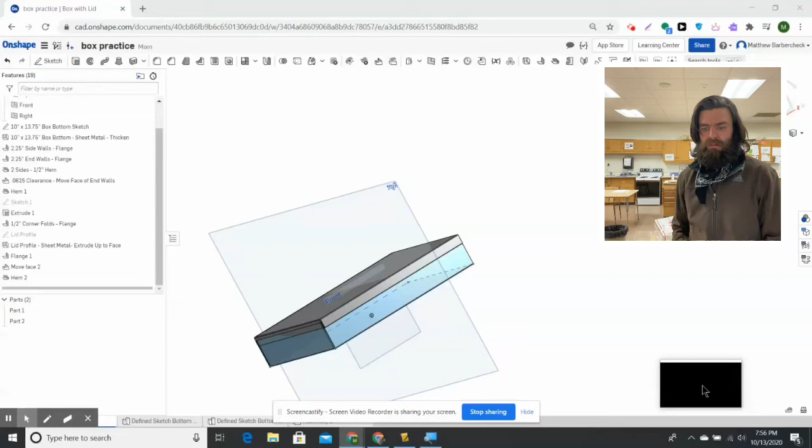Let's get to it here. So here you see the hems, the lids, the corner folds, everything. So I roll that bar back, and now we're just looking at just the box.

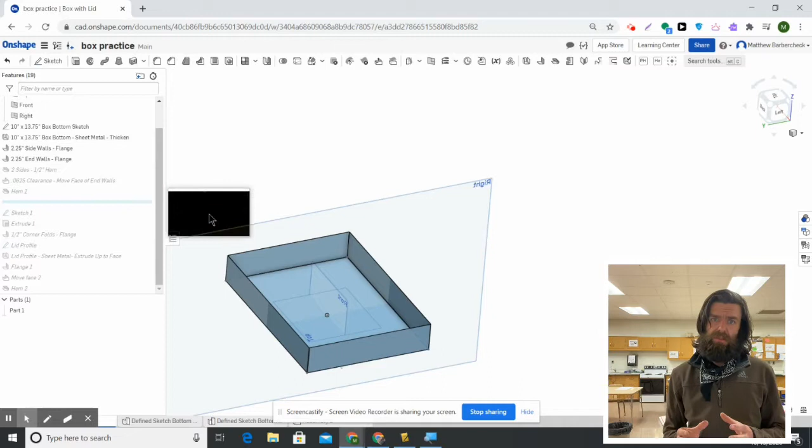We're gonna add 2 of the hems, and then we're gonna have to make a little bit of an adjustment, and then we're gonna add our 3rd hem.

We've got our flat view, and the hems, when we add them, are updated, so it'll start to look very familiar to the in-person layout that you guys have done.

When you hover over something, it turns gold, so you can select it to let you know that is what you're going to select. It turns gold in both views. Look at the flat view right now, and you'll see that the same wall that I'm hovering over in my 3-dimensional view is being highlighted.

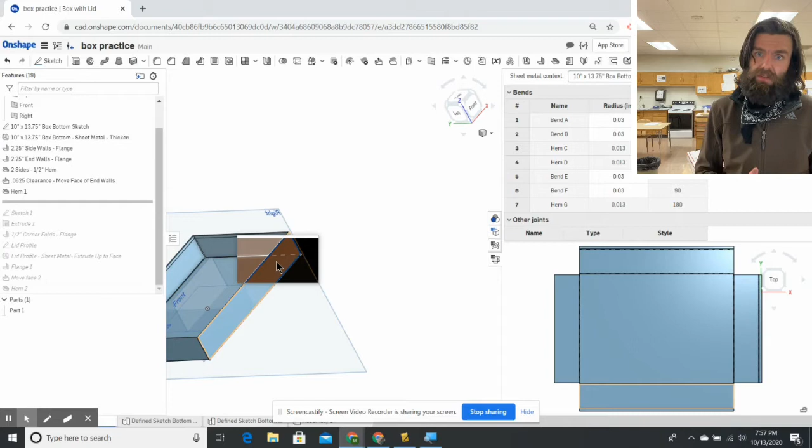Started a dog ear on this end. I will do that in the next video.

I'm going to duplicate this setup. I'm going to delete a bunch of the features that I've done ahead of time so I can get back right to where you guys left off.

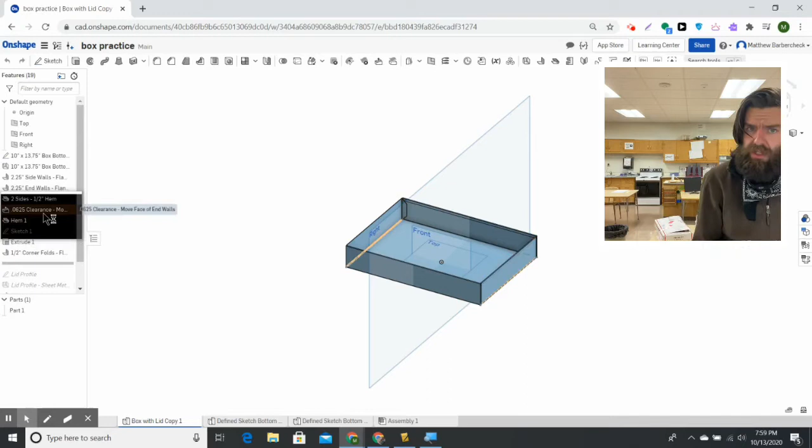To delete something that's in your feature tree or design tree, simply right click and scroll down to hit delete. Now, I don't believe that option is available if you are inside of a feature, like for example if you have a little mini window open, usually a sketch or an extrude or your flange command.

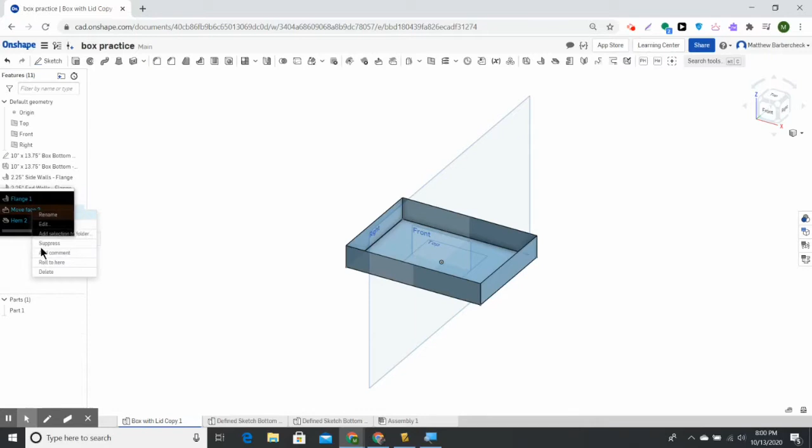I went ahead and opened up my flat view because I'd like to see my flat view updating as I update the 3-dimensional view. I'm gonna go ahead up to my sheet metal toolbar, and I'm gonna select the hem tool.

I'm gonna go ahead and hem the 2 long ends first.

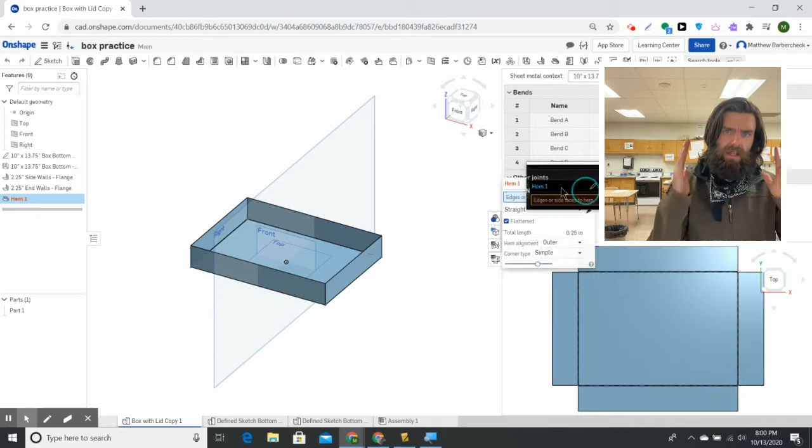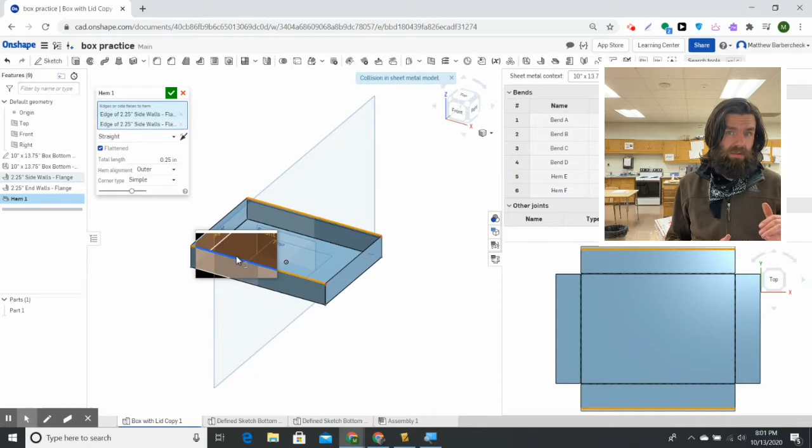You're gonna see we're gonna keep those 2 side wall hems straight, flattened with the check marks, and 0.25. You should also be attentive to if the hems are bending inside the box or outside the box, because that can be adjusted with your double arrows.

I'm gonna go ahead and name it sidewalls, 1/4 inch hem, and then hit our green check mark.

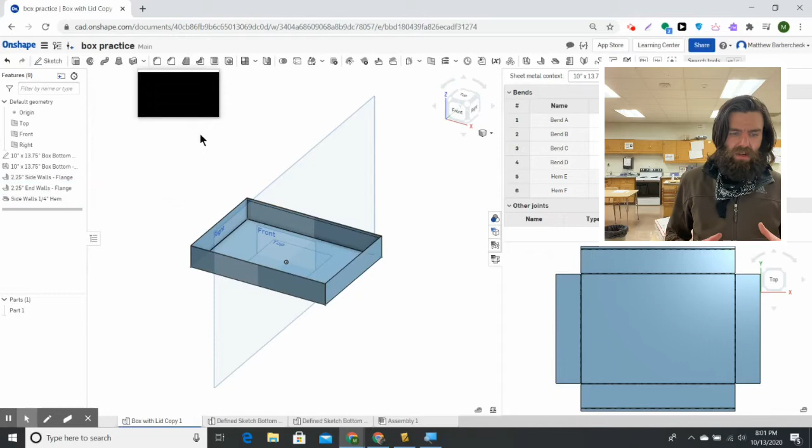Try and add a hem to the 3rd wall. Notice though, when I try and do that 3rd hem, that we end up with interference.

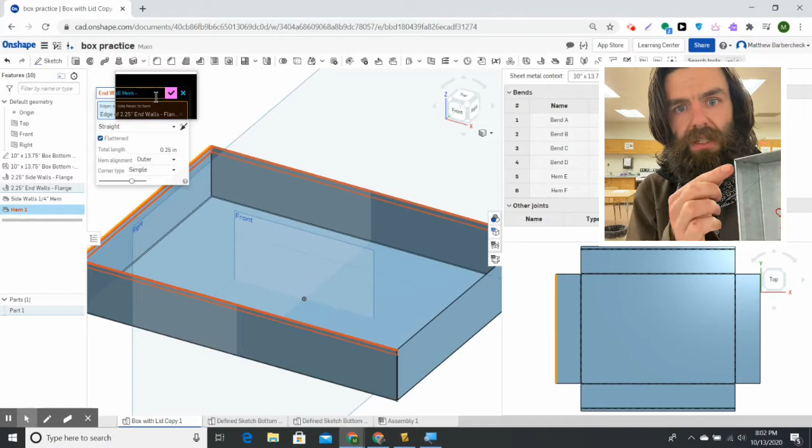In fact, if you zoom in on those red lines, you'll see what's happening is this sheet metal in this corner, when you fold it over, is hitting the sheet metal in this corner, and that can't happen.

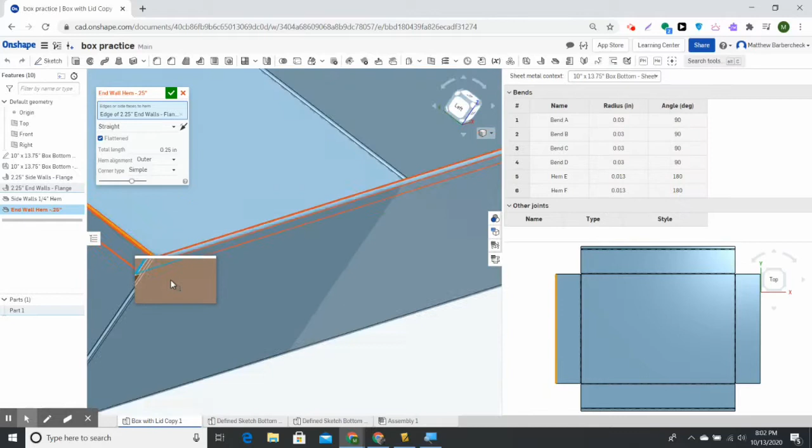It's tough to see the collision point, but see how the metal is folding into each other? So what we're gonna do is we're gonna make the end walls just a tad shorter than what we have right now to give us that clearance.

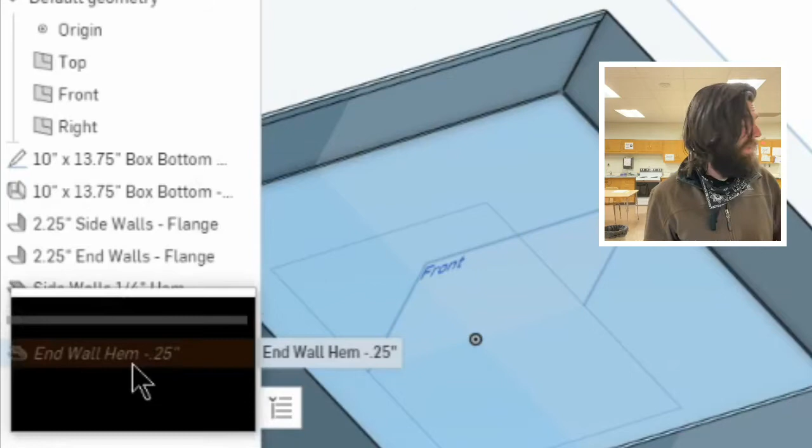I'm gonna drag my roll back bar right above that end wall hems feature. And I'm going to leave that end wall hem feature there, because while it's there, it's not hurting anything. And it will remind me that that is the end goal.

To shrink the walls of that end wall, I'm going to use a command called move face.

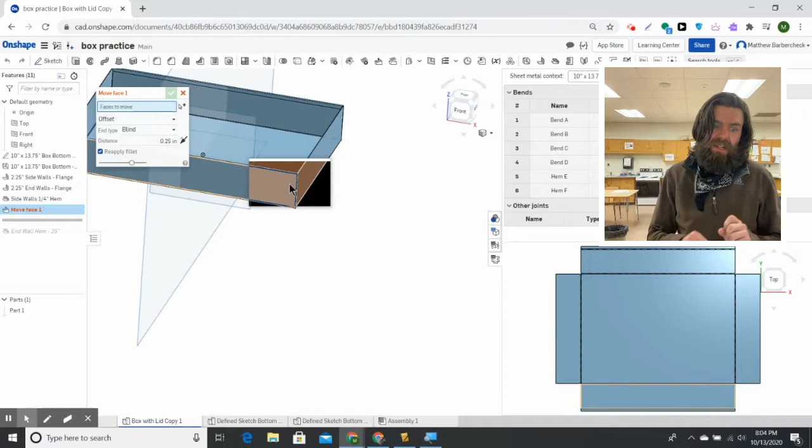We got to zoom in on that end wall face, and I recommend zooming in to the top corner of your part. That way you don't get the 2 faces mixed up, because you can obviously see there's a hem on one of them, and we're moving the face of the wall that does not have a hem.

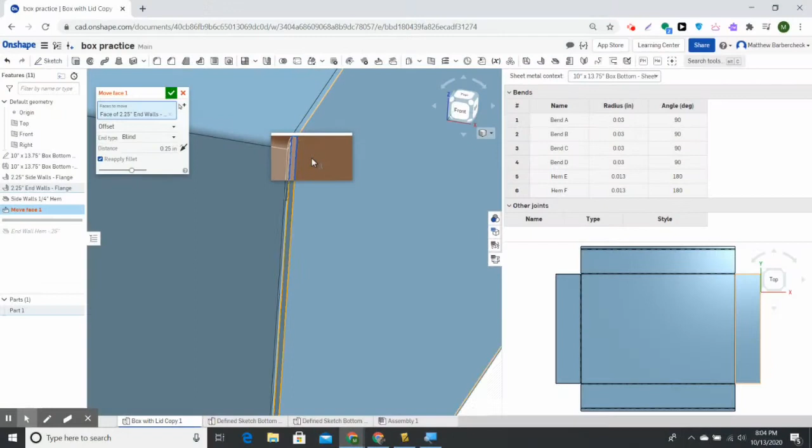Now we're going to move this face. It's going to physically relocate it 0.0625 away from the corner, which is the same as 1/16.

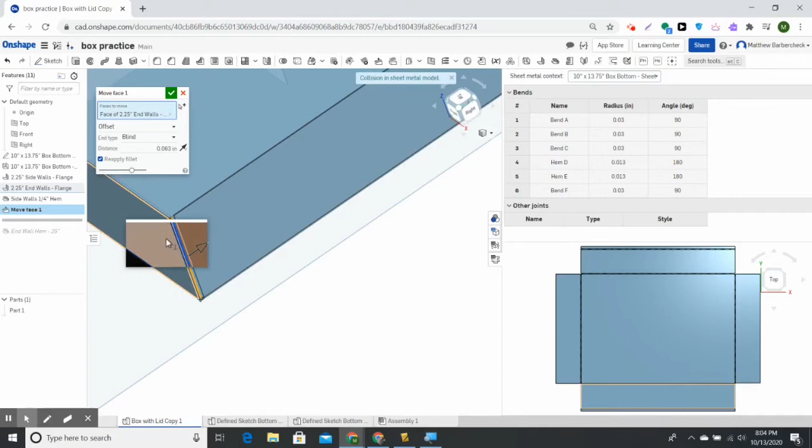Make sure the arrow is pointing inside the box, not outside the box. Otherwise, your wall will actually grow. We want it to shrink. So have the arrow pointing inside the box.

Now, it doesn't really matter which corner you start this on, but I would recommend making sure that the dice in my right-hand corner is oriented in a similar way to the dice in your corner of your screen.

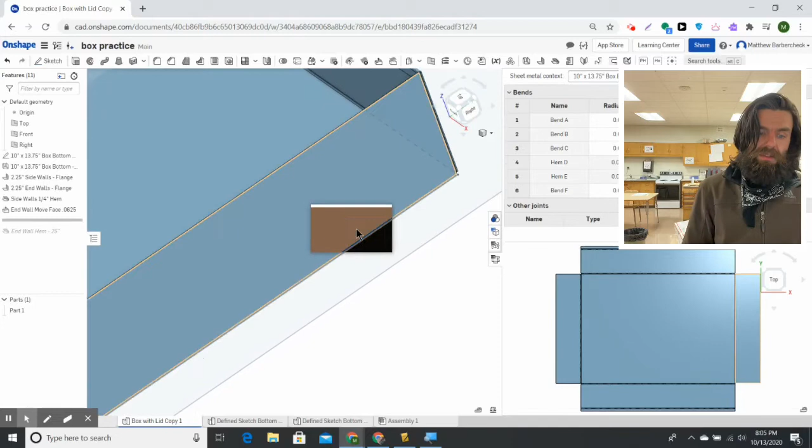So I named that move face command. You're going to do the same. And we're going to use the exact same method to get the opposite side of that wall to shrink in 1/16 of an inch. So follow along and tackle this one maybe a little more independently.

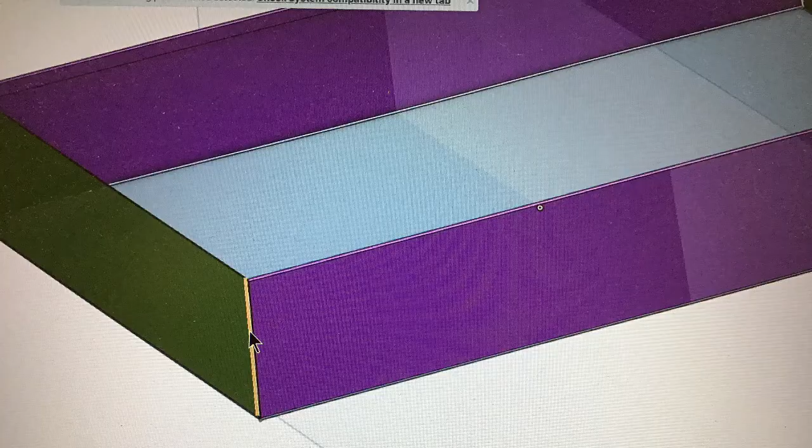Remember, you're picking that skinny face that's on the end of your short walls, shown here again in yellow. We're going to go ahead and shrink the opposite end wall in a similar manner.

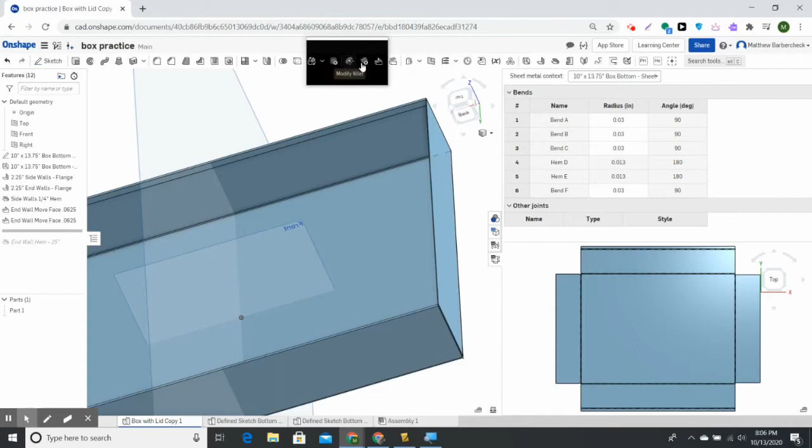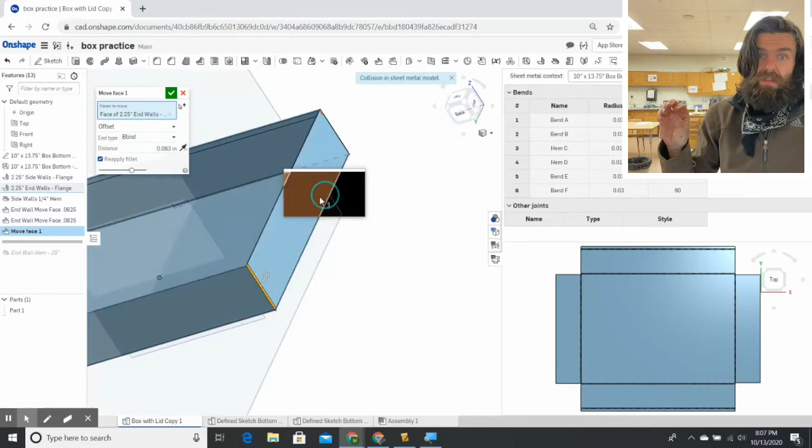In the feature window for Move Face, there is an input rectangle that shows your selections. And this time, instead of selecting one of these skinny faces, we're going to do both of them. It brings up face of 2.25 inch end walls, another good reason to name your features so that you can visualize some of this.

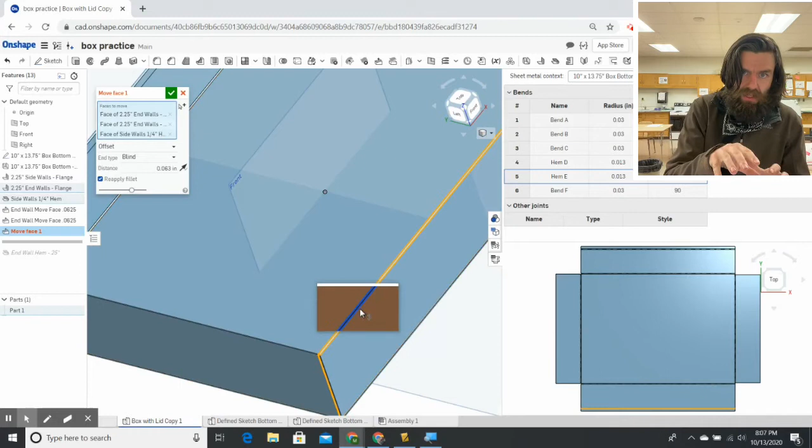Now, what happens if you click the wrong thing like I just did? Well, you can click it again to deselect it, but oftentimes what happens is we accidentally select more and more things, and if you look at the number next to your cursor, it'll tell you how many things you've got selected. And when you click something and it's selected, if you click it again in the exact same spot, it'll deselect it. But if you click something else on accident, it'll select it.

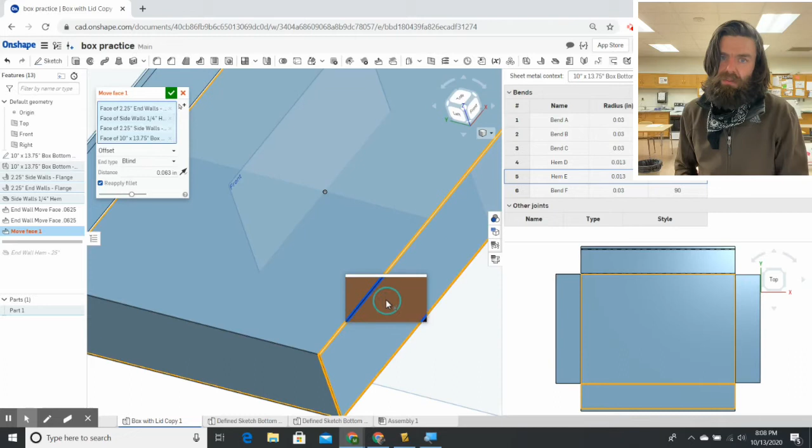So use the blue rectangle and exit. Just hit the red X on any name or part or whatever that you don't recognize or doesn't think it should be in the move face command, and that'll clean up your blue rectangle so it only includes the faces you want to move. I'm going to name it end wall move face 0.0625 pair because we did both of them with that feature.

And in theory, you could have done all four of them that way.

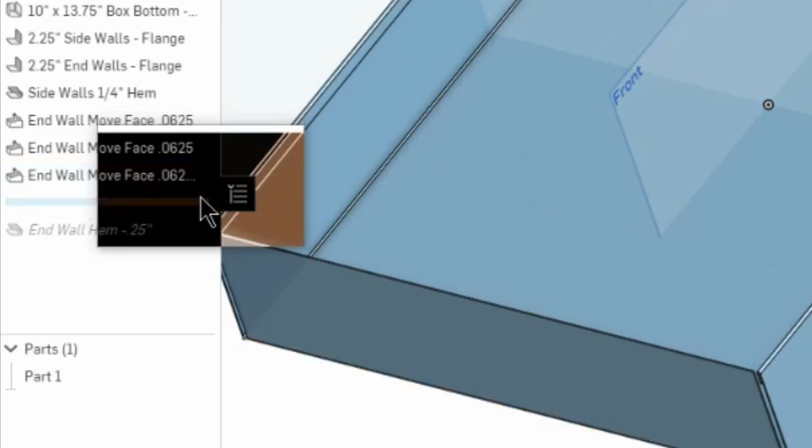With both those end walls shrunk down, you're now able to bring your rollback bar back down, reactivate that end wall hem that we started with, and you'll see that all four sides will have a hem. They'll show up in your flat view.

In the next video, dog ears.